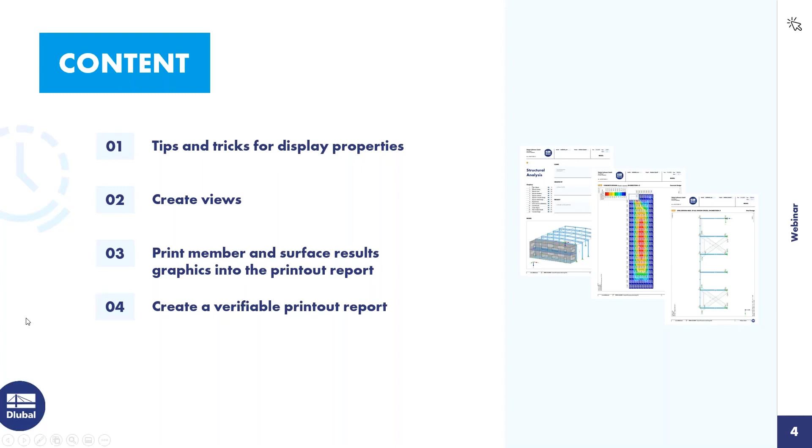Okay, then we turn to the program. That's the model of today's webinar. There are members of steel and surfaces of concrete. I designed the steel structure and that slab here. But before I start, I would like to introduce something. I would like to show you the loads.

So without results, the self-weight load case with the roof loads and the loads on the slabs. Then the imposed load with the loads on the slab. The snow load case. For the snow load, I use the snow load wizard. I can display it by right click on the load separately. That's the load from the snow load wizard. And if there are members below, then the program creates member loads automatically, and you can see that here in that setting. Okay, the same is valid for the wind load case, wind in X direction.

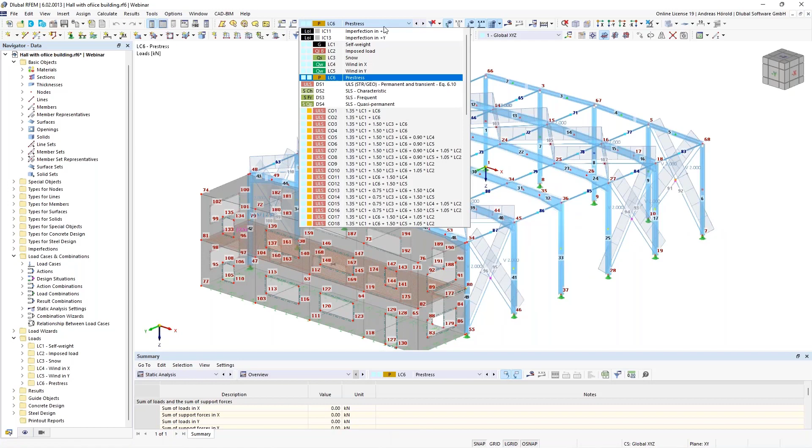I can display it also separately. Here are member loads and on this side, surface loads. So wind in X and wind in Y direction. I created only two wind load cases in this example. And the last load case is the pre-stress. And we've got also imperfection cases in X direction and Y direction. Okay, that's all to the loads.

Then here left in the navigator data, I do right click to open the dialog load cases and combinations. I go through this dialog very quickly. In 2 weeks, I will present a webinar only describing these dialogs. I used for the combinations the Eurocode 0. You can see here different international standards. And for the Eurocode, there are a lot of national annexes implemented. I use the German national annex.

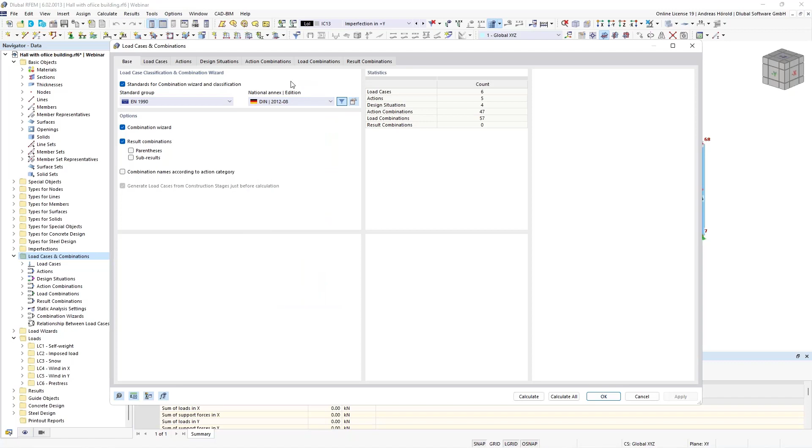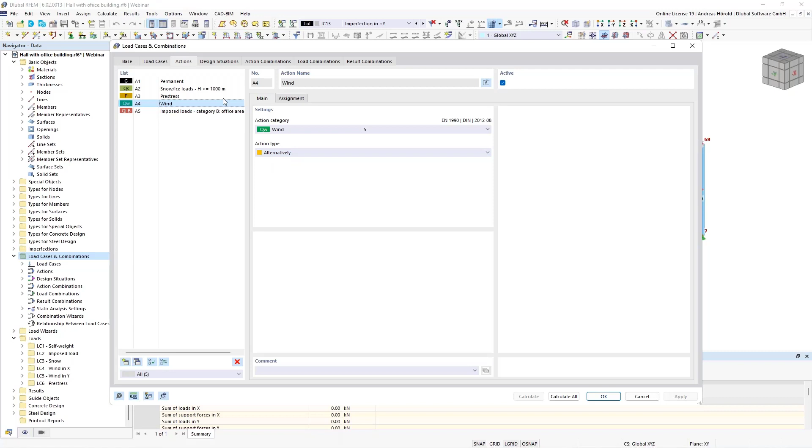Then the load cases, the 6 load cases that I introduced at the beginning, the actions, for example, the wind action, there are the two wind load cases assigned, and they act alternatively. Then the design situations: design situation number 1 is used for the concrete design and steel design. It is for the ultimate limit state design. Then design situation 2 for the serviceability limit state design characteristic. It's activated for the concrete design and steel design, and these 2 design situations for the serviceability limit state design are activated only for concrete design.

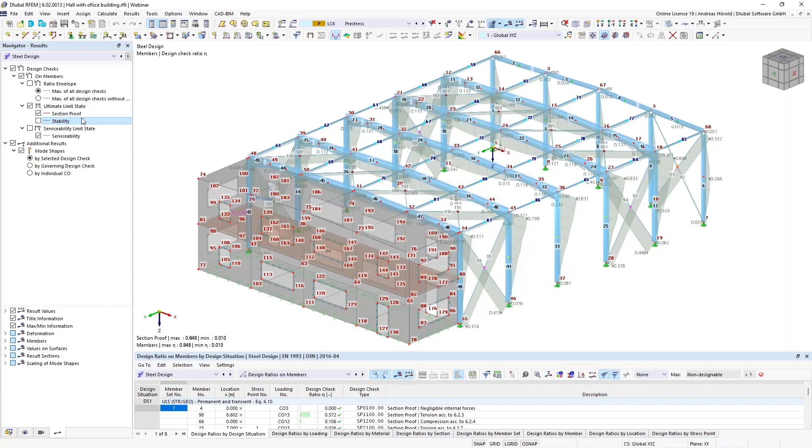So if you click on overview, you can see which load combinations are assigned. I can click through them. And here in this dialog, you can see all 57 load combinations. Then I designed the steel structure with the add-on steel design. So without loads, now you can see the maximum ratio of all design checks. Then I can click through these single designs here, the ultimate limit state section proof, stability, and serviceability limit state design.

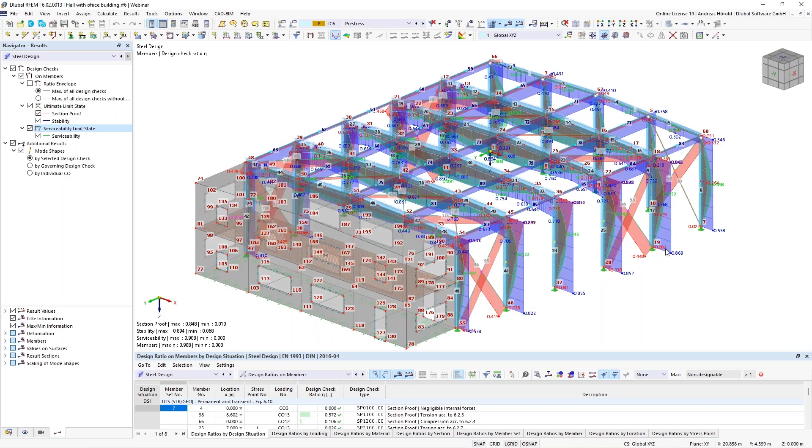Okay, although they are displayed in different colors, you can see it's quite confusing. That's why we print not only the isometric view with the separate design checks. We create views in axis 1, axis 3, and axis A with the multi-print feature. Okay, I disable it. And then I show you the concrete design.

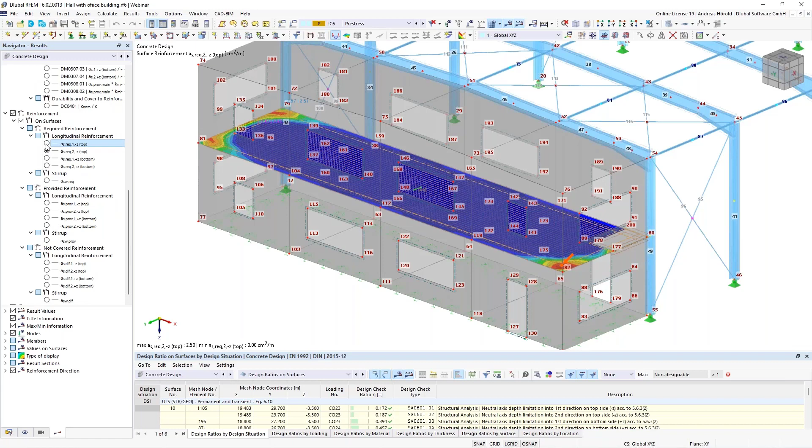I designed only this surface here, the slab. I can zoom in a little bit with the mouse wheel. Then here in the navigator results, I can click through the required reinforcement, and I would like to print these 4 graphics in the printout report later with one step.

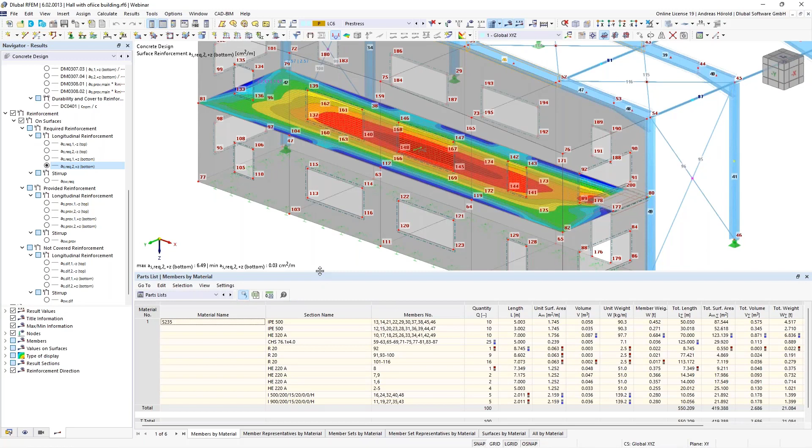Okay, then parts list. We will also print a parts list in the printout report. I will come back to that later. That's a new feature in RFEM 6 and RSTAB 9. So before we print anything, I define a line grid. Just a moment. Static analysis. So line grid. Left above in the menu, insert, then guide objects, line grids.

Usually you define a line grid as the first step, not afterwards. I do that retroactively, and it's not a problem. You can do that anytime. I would add a label text. Then here, line grid, I have to enter the distances in X direction, 4 times 5 meters. You can edit or change the labels here. I leave it as it is for this webinar.

Okay, then also 5 meters in Y direction, 5 times, and a short distance, that's the distance between the concrete and steel structure. Okay, that's all. I can apply it and I'll see it in the preview. Okay.

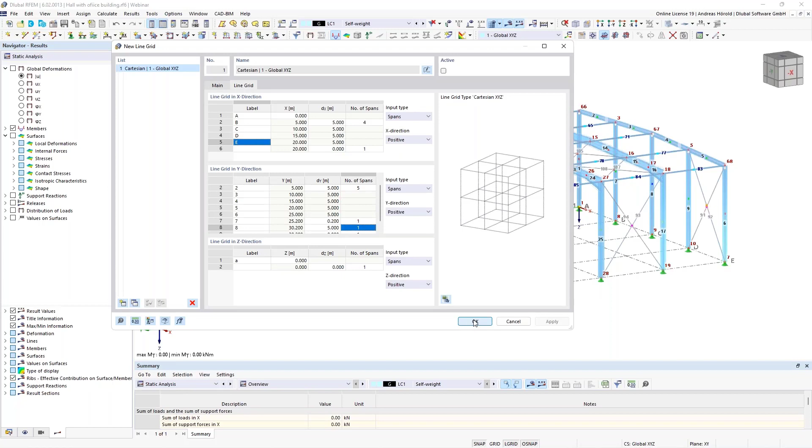So I forgot to activate it. No problem. I go to the navigator data. Here under guide objects, you will find the line grids. And with a right click, you can activate the line grid. I can double click on it. I forgot to set this check here. Okay. If I would like to change anything in the display settings for the line grid, I can right click on it and open it.

Just a moment. I load the white background. Okay. So I can leave the dialog again. Right click, I show it again. Display properties, and you will get directly to the category here. A tip from my side: the categories in the display properties are similar to the categories in the navigator data and navigator display. If you want to find anything, you can right click on the object, find it here, and then it's easier to find the object in the other navigators.

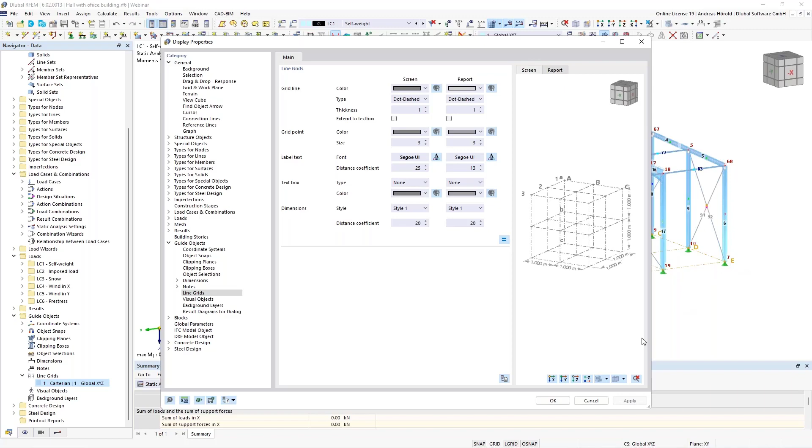Okay, then I change the font to bold and size 12 and change the distance here. Just take a look at the text here. When I press apply, it will be larger. Okay, so now the line grid is complete. I know where each axis is and can start with the views.

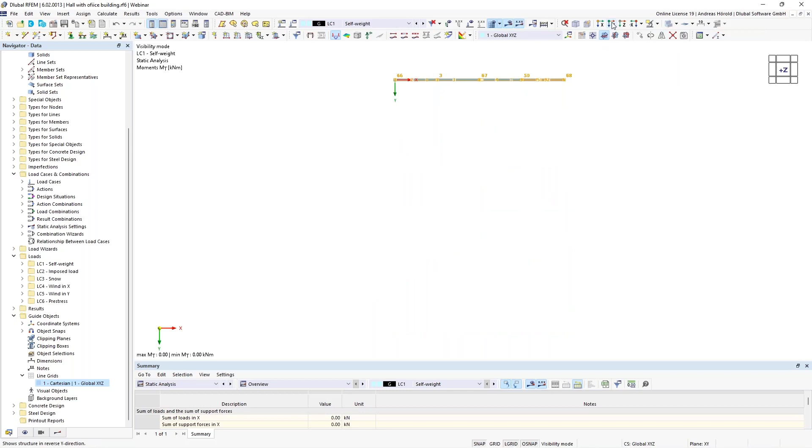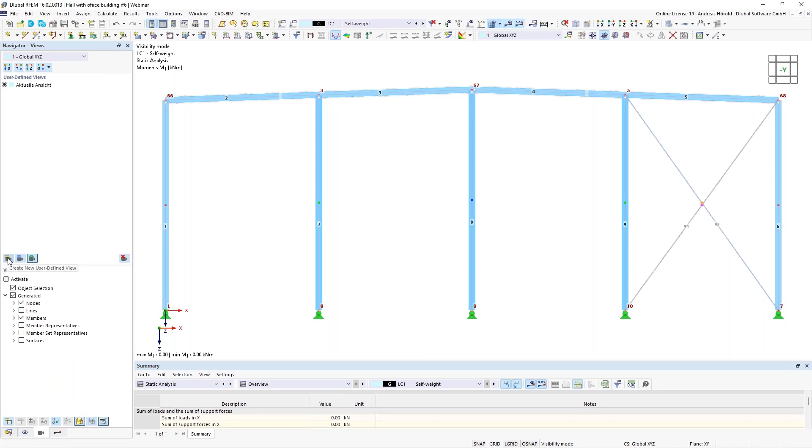Here right above, I click on view in Z direction. Then I select all objects in axis 1. Press visibility by selected and related objects. Change the view to -Y direction. Okay, that's the view I would like to create. So at the bottom left, I change to the navigator views and create a new view with that button here. I call it axis 1. So that's the first view.

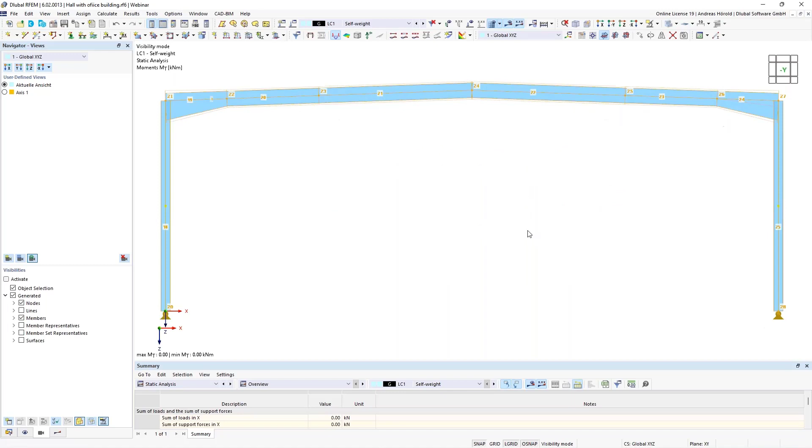Right above, I click on cancel visibility mode, change the view, select all objects in axis 3. Then I display only these objects, change the view again. And I can save the next view, axis 3. Okay. Then the same workflow again.

So all objects in axis A. Then view in -X direction. Okay, I can zoom in a little bit. Now I can cut the concrete structure. It's not interesting for our results for the steel design. So axis A.

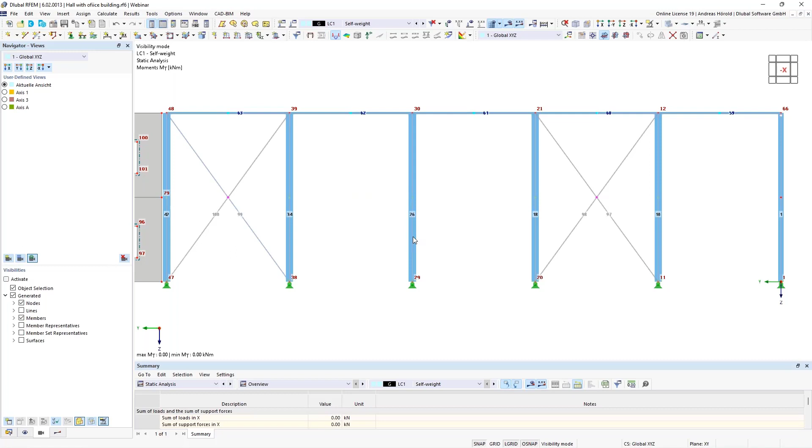Then I cancel the visibility mode again, and I select the concrete slab. Display only this one. Change to Z direction. Okay. And I would like to create a view also for this slab. As you see here, I created a surface reinforcement for the concrete design. It's a mesh Q257. And I don't want to display it, so that it does not disturb the display of the results.

But I'm not sure where I can find it in the navigator display. That's why I apply the tip that I gave you. So right click, display properties.

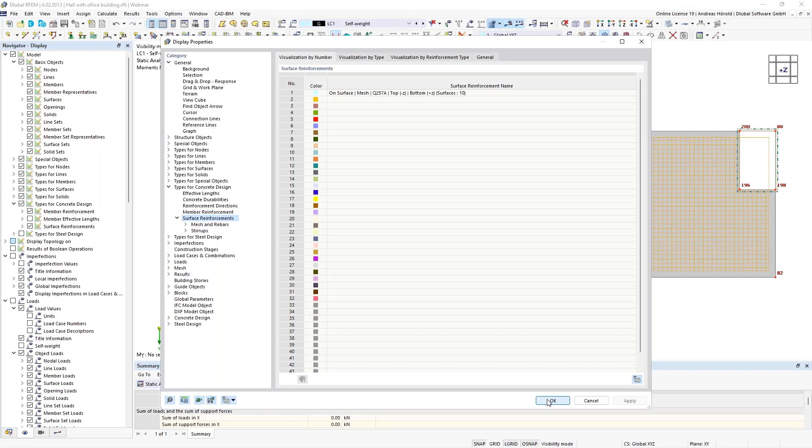Yeah, and you can see in the category under types for concrete design, you can find the surface reinforcements. You could change the color here, but I don't want to change anything here. I used it only to find the category for the navigator. Okay, types for concrete design. You can find here types for concrete design, surface reinforcement, and I can deactivate it for the display.

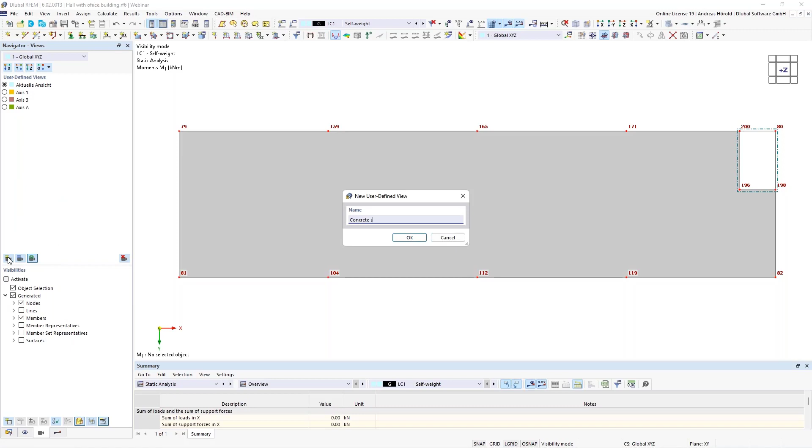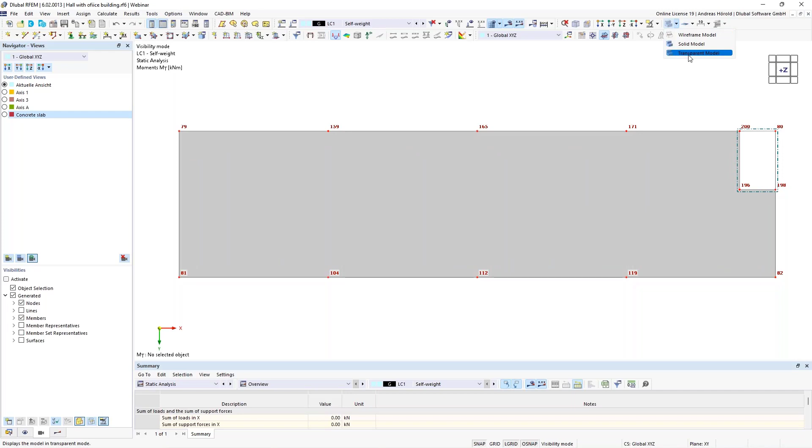Okay, then I create the next view. Concrete slab. Okay, so now I recognize that the gray color here can maybe also disturb the displaying of the results. I use the view transparent model and I change to wireframe model.

But now I have to update the view. How to do that? I unlock the views with that button here. Then with the middle button, I redefine according to current view. Then I lock all again, and then I can switch between different axes and can see the view is updated. So then all views are created. I cancel the visibility mode again and use the transparent model.

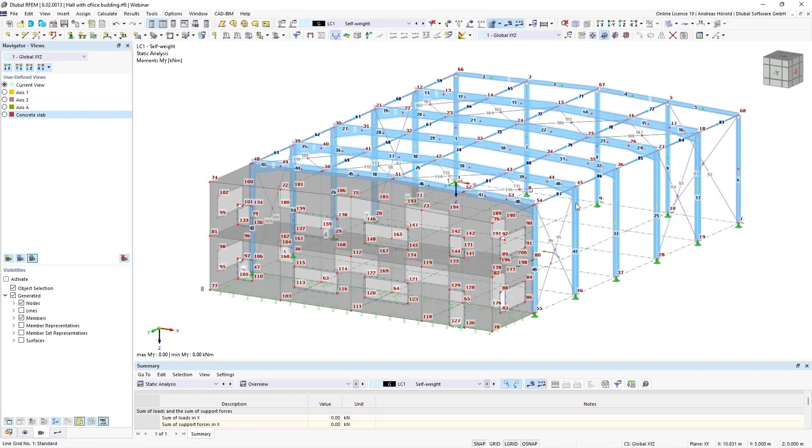For the isometric view that I want to print also in the printout report with the steel design graphics, the concrete structure maybe disturbs also the display. So that's why I would like to deactivate it, or I don't want to display it. So that's why I select all, and here right above I hide the selected objects. So now it's not visible. Maybe we can display it but hidden.

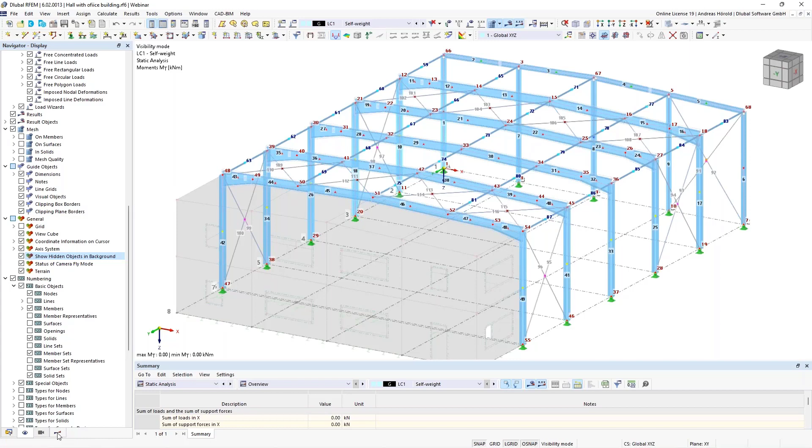How to do that? I change to the navigator display, scroll a little bit down, and under the general settings you can show hidden objects in background. Okay, I like that more. So then in the next step we can print the steel results. So I can display them again. So, okay, maybe I can rotate it a little bit. I would like to print that view and the other views.

So left above here, you can open that drop-down menu and select Print Graphics to Printout Report. So then you can see a preview here. You can rotate the graphic. That would be 0. And if you want to rotate it in a clockwise direction, then for example 90 degrees, then you need to select this. But I would like to rotate it 90 degrees anti-clockwise. That's why I use

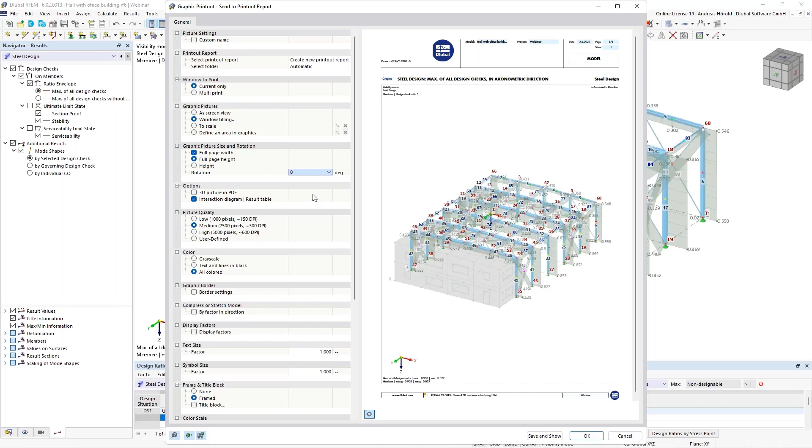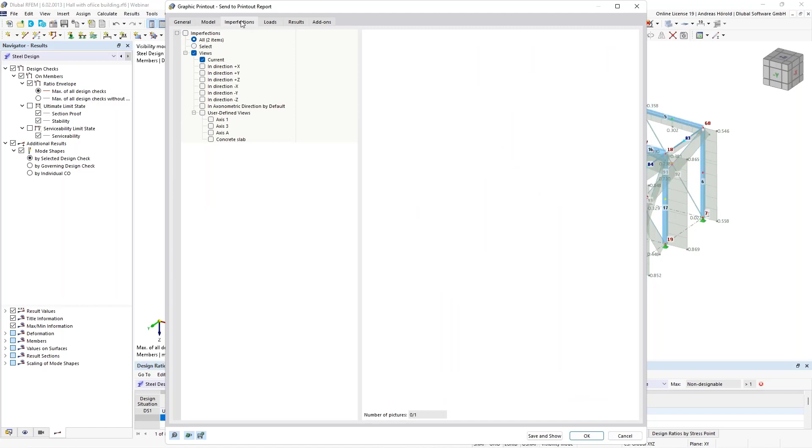270. So you can use a screen view or window filling. It doesn't matter. Okay. And if you want to print only this graphic in the printout report, then press OK or save and show. That's quite easy, but I would like to use the multi-print feature. So I go through the single dialogues. I don't want to print the model, no imperfections, no loads, no results.

It's of course possible to print the member results, for example, the internal forces. I would like to print only the steel design results in this webinar. So the current view, that was the isometric view, then the saved axis. Then on the right side, I select the maximum of all design checks, the ultimate limit state, section proof, stability, and the serviceability limit state design. And at the bottom, you can see there are 16 pictures that are created in few seconds.

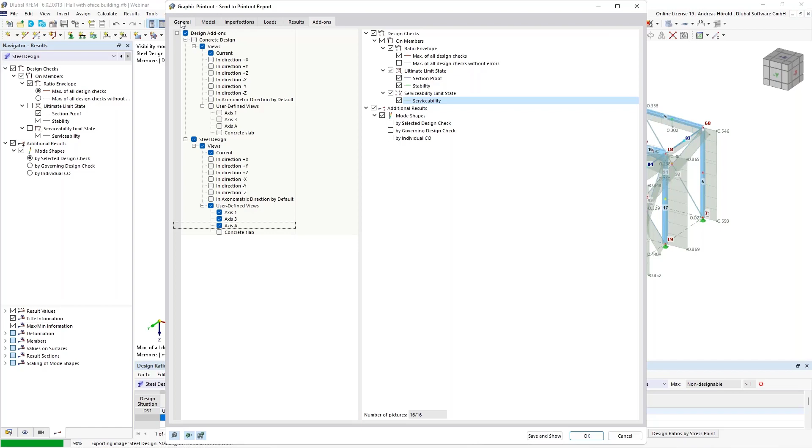I switch back to the general dialog. And all images are created. So that's the isometric view with the 4 design checks. Then axis 1 with the 4 design checks. Yeah, and you can see in the preview, it's quite good readable in the views. And this is axis 3, etc. Then I press save and show.

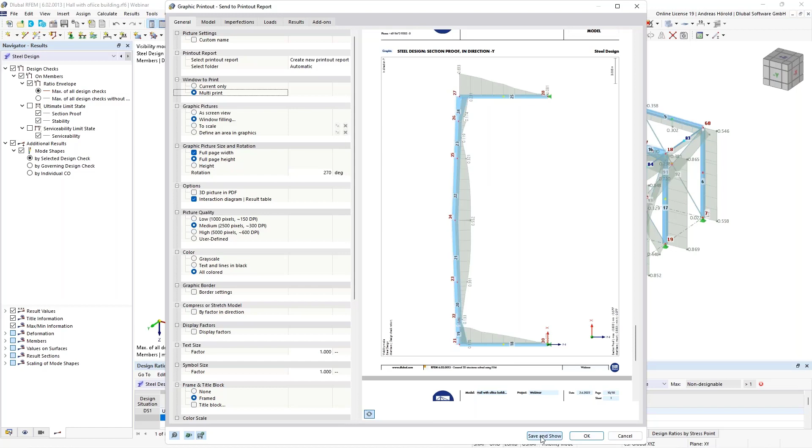And we turn to the next dialog, printout report manager. Since we open the printout report for the first time, we have to select what we want to document. Okay, and here at the bottom left, you can load from a template. There are different templates already available. For example, the input data and reduced results. That's the default setting. Then the concrete design, steel design, etc. So I use the default setting. Yeah, and of course you can save a template with this button here, save as template.

Then parts list. I select only this one and this one to show it later in the printout report. So then, for example, concrete design, where are the tables with the design ratio and surfaces selected, then the required reinforcement. For the steel design, the design ratio and members by member set and by members. Okay.

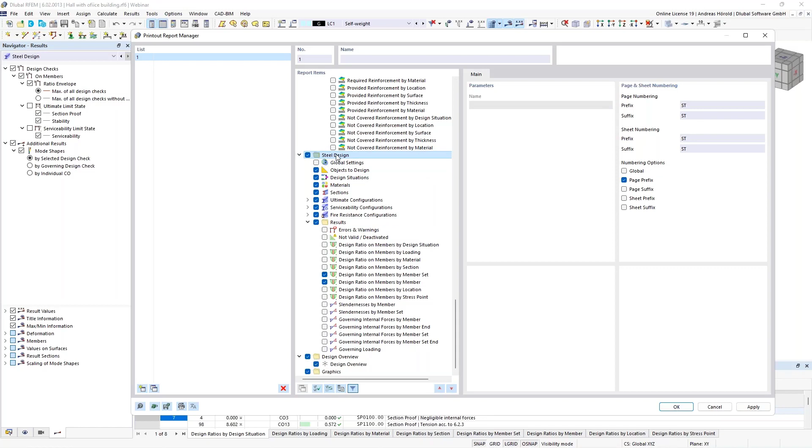So on the right side, you can select here, for example, page prefix, then prefixes will be added, for example, for the steel design, ST, or for the concrete design, CO, or for the model, MO. So, okay. Then the printout report is creating. At the first time, it takes some seconds. Okay, that's the printout report.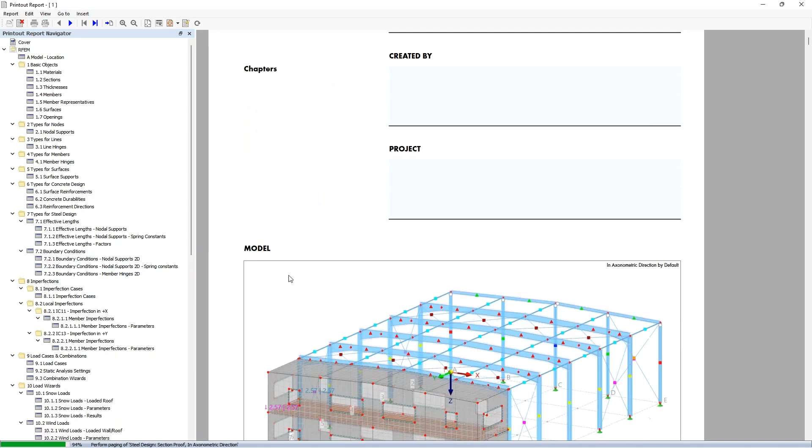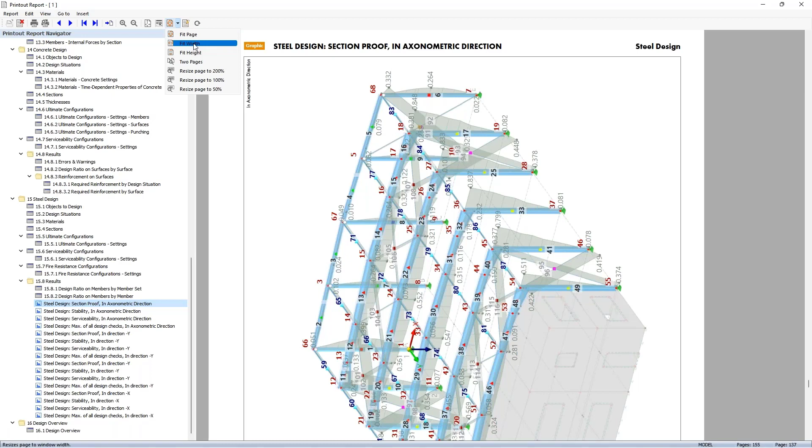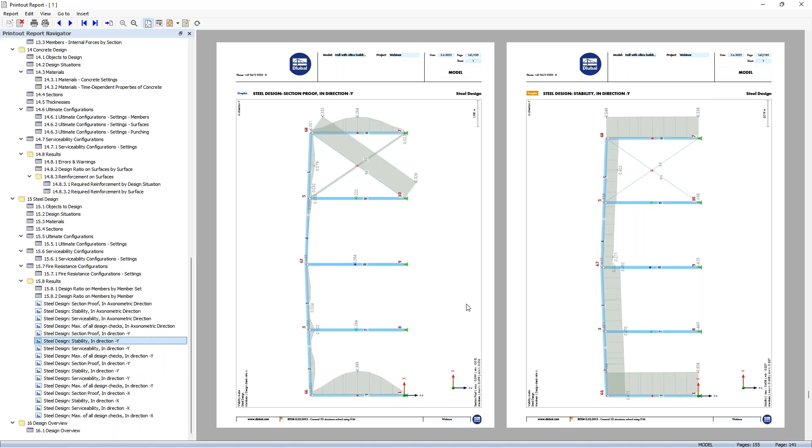On the left side, you can see the content. And what's interesting to us in the first step are the graphics here. Above, you can switch between different displays, for example, fit page, fit width, fit height, and so on. 2 pages. I fit the pages. Okay, so the 4 graphics for the axonometric view. So then axis 1, axis 3,

and axis A. As you can see, the last 4 graphics are with the concrete structure, and I can modify that. With the Shift key, I can select all 4 graphics here on the left side. Then I do a right click, go to Properties, and select not window filling, but as screen view. And all 4 graphics will be updated in the next seconds. So let's take a look. Okay, now the concrete structure is cut again.

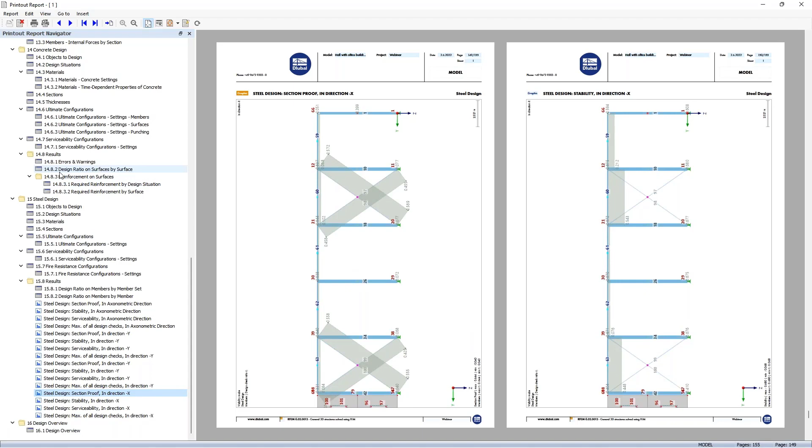So then I would like to show the parts list. I fit the width. Parts list. You can see in this table here the section name, then the length, the total length, and the sum of the length, then the total surface area, for example, to calculate the coating or galvanizing, the total volume and the total weight. And you can also document the total weight by material here, steel and concrete.

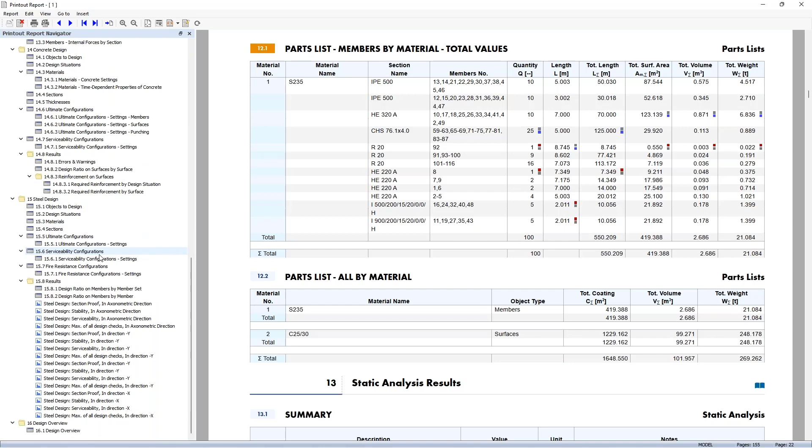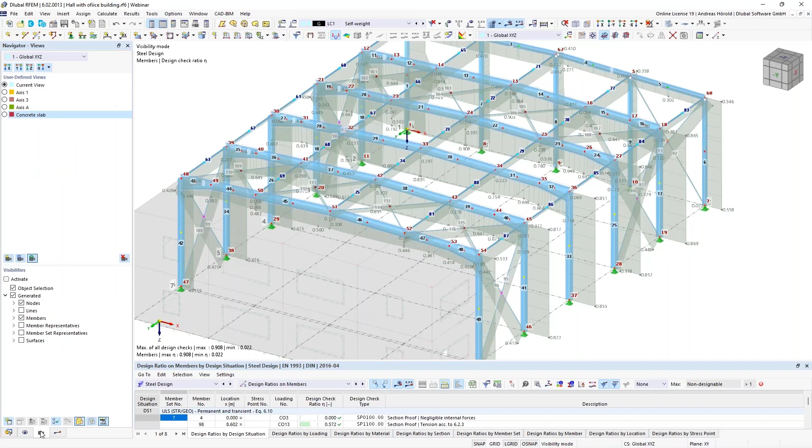Okay, then I moved the printout report a little bit on the other screen, and as you can see, I can work in the program and in the printout report in parallel. So I move it completely to my other screen. I would like to show you another feature. I select axis 3, and I would like to print the result diagram of this member set here, the horizontal beam. That's member set 3, and I would like to print it in the printout report.

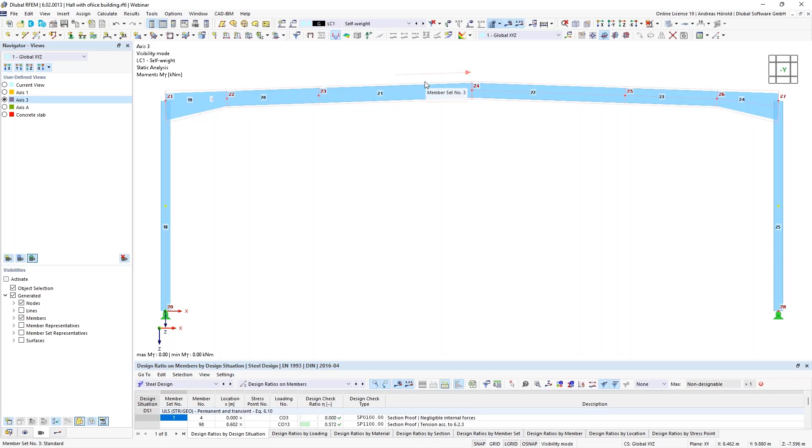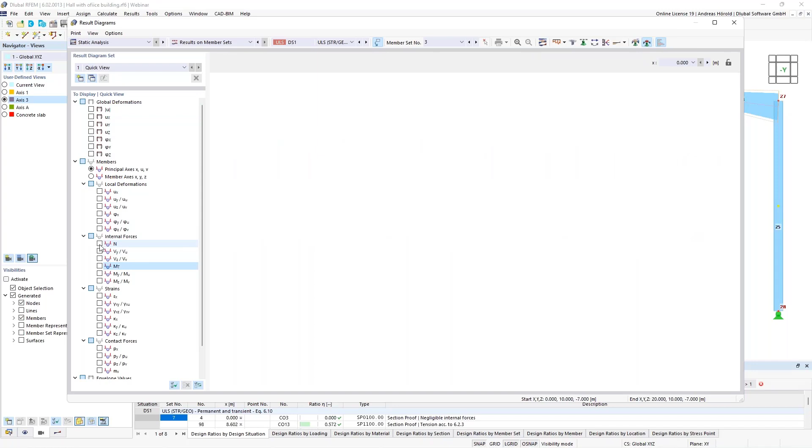Right click on the member set, then result diagrams. So then I have to select here, results on member set. That's okay, but not the self-weight load case, but the ultimate limit state design as design situation number 1, member set 3. Okay, I would like to document not the global deformations, but all internal forces. N, V, M. Okay, so 6 diagrams are displayed, and with that button above, or with the drop-down menu, print graphics to printout report, I can print that graphics. So all graphics on one sheet at the moment.

I can press here on the left side, determine diagram height automatically. And now it's much better. And you can also set the diagram height manually. I tested it before. 7 centimeters is also a good parameter. Okay, then save and show. You can leave the dialog, and we can take a look in the printout report. Here is the result diagram. I fit the page, and you can see the 2 pages here.

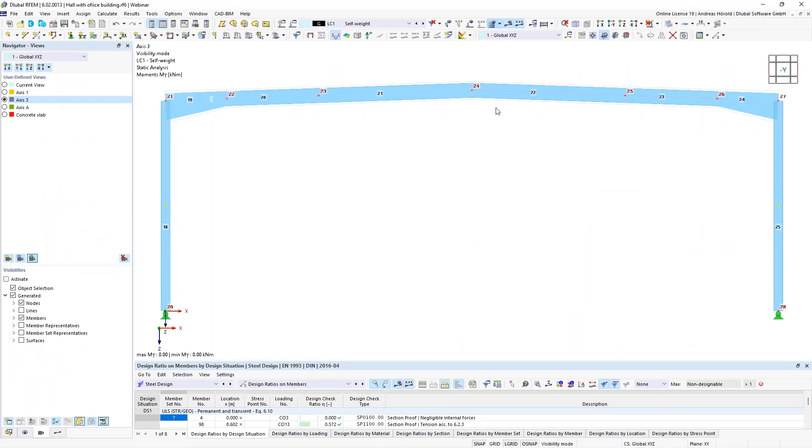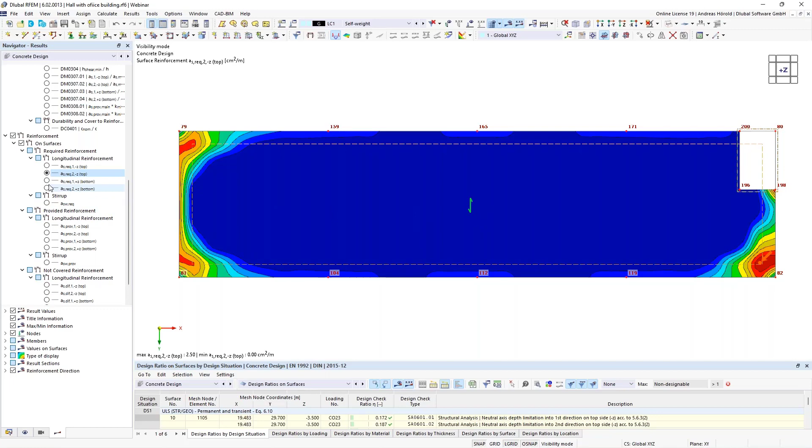Okay, that's all for the steel design documentation. I continue with the concrete design. So that's why I go back to the program. So I use the view concrete slab. Let's display the concrete design results. Okay, then I change here left above to the navigator results. And we can click through the single results, the two directions of the reinforcement on the top and at the bottom. You can see the direction of the reinforcement with that arrow here.

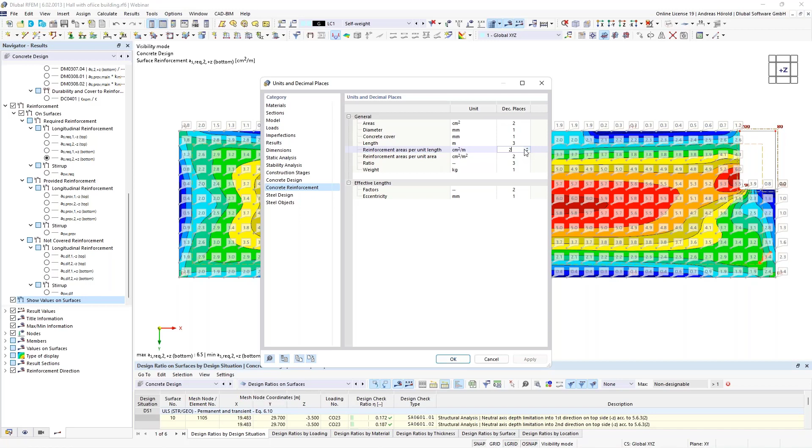Okay, and I would like to display the values as well. If you want to delete one decimal place, then you can go here left above to edit, then units and decimal places. And under concrete reinforcement, you can find the setting here, reinforcement areas per unit length. So, if I change that and press apply, you can see in the preview there's only one decimal place now. Okay. I leave it as it is. Let's try it. Okay, then I print all again.

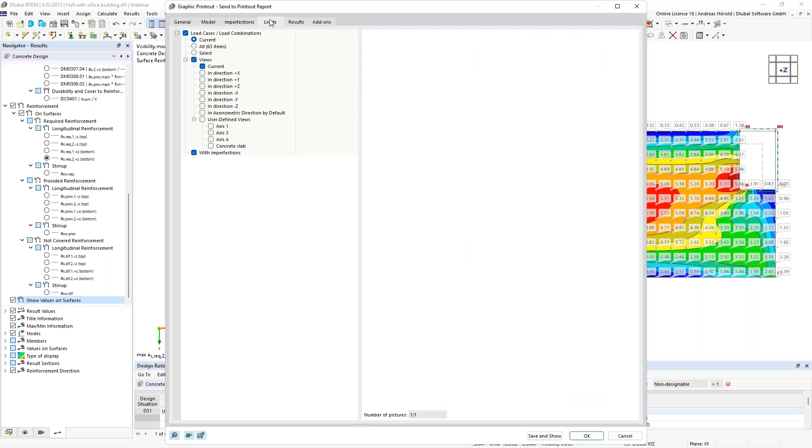In the first step, I select the current view. Yeah, that's quite okay. The rotation is okay as well. Window filling, okay. And I select the multi-print. I would like to print all 4 graphics.

So, concrete design, the current view, and the 4 results for the required reinforcement. And I select also show values on surfaces. Here, 4 pictures will be created.

We can scroll through the 4 images. Yeah, it looks quite good. Then we can press save and show and go back to the printout report. So, take some seconds. All is updating.

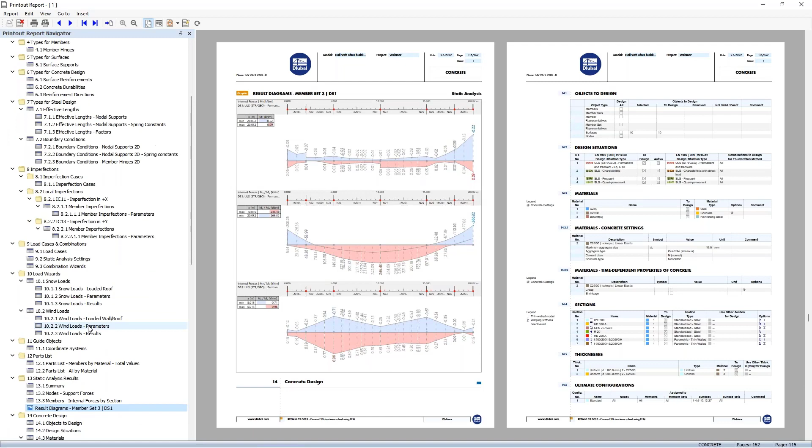So, now the 4 graphics are printed in the printout report. Yeah, I think that's quite easy. Just test it. And that's all for the steel and concrete design documentation. I will continue with general features of the printout report.

So let's click through the menu. Here left above, the report. Yeah, close report, it's clear, and so on, delete. And at the end, we will export the finished printout report to a PDF. So edit, you can edit the printout report. It's the same button as here. You can add more topics if you want.

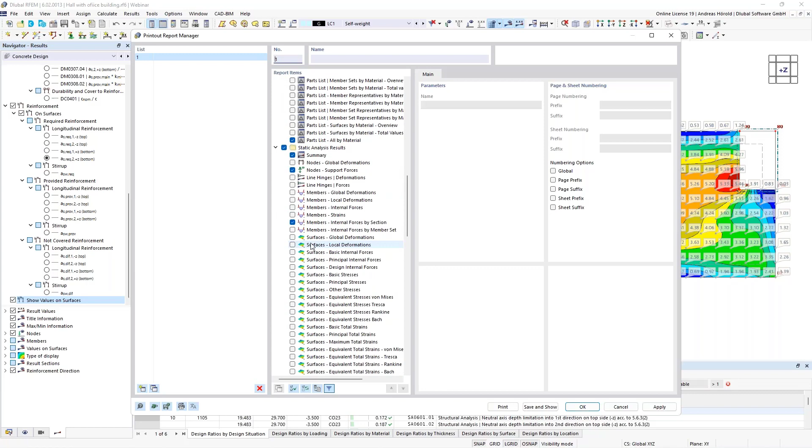So I go back to the printout report here. So then you can use the copy, cut, and paste function. Shortcuts, Control and C are available, and so on. So you can set a language. You can translate the full printout report in another language.

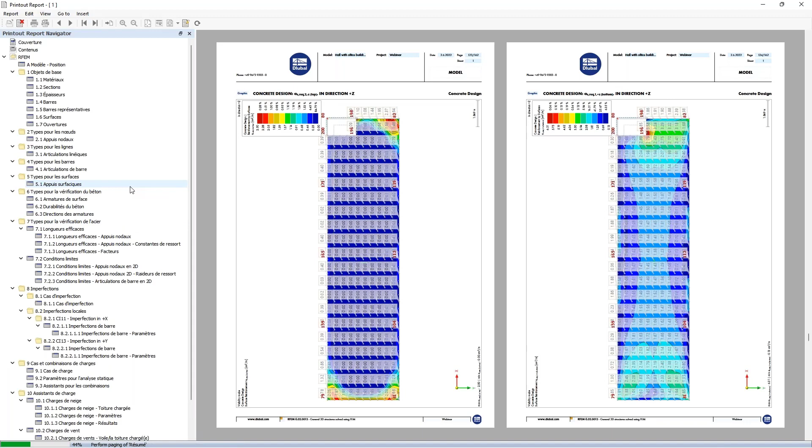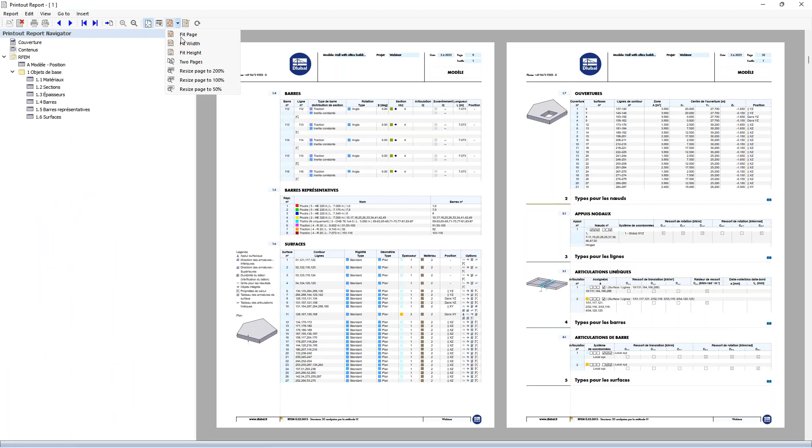I select French. There are 11 languages available in RFEM 6 and RSTAB 9, and it takes only a few seconds to translate such a printout report. Now we have got more than 150 pages, and you can see that it is already translated here. All is in French now.

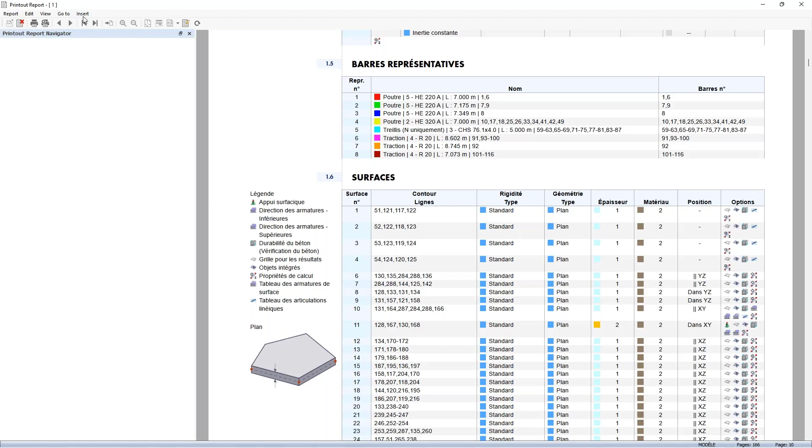I change it back to English. Okay. Then we have to wait some seconds. Go to, yeah, where are these buttons? You can switch between the different pages. You can open here, go to. I would use these buttons here, come to the end, to the beginning, to the next page, and so on.

And you can also click through the menu here, or the content, or navigator. So then insert, you can insert different things, images from file, an image from clipboard, then a plain text, rich text, HTML, then formulas, PDF. And I would like to insert a plain text and a PDF. The workflow is similar for all. So I start with a plain text.

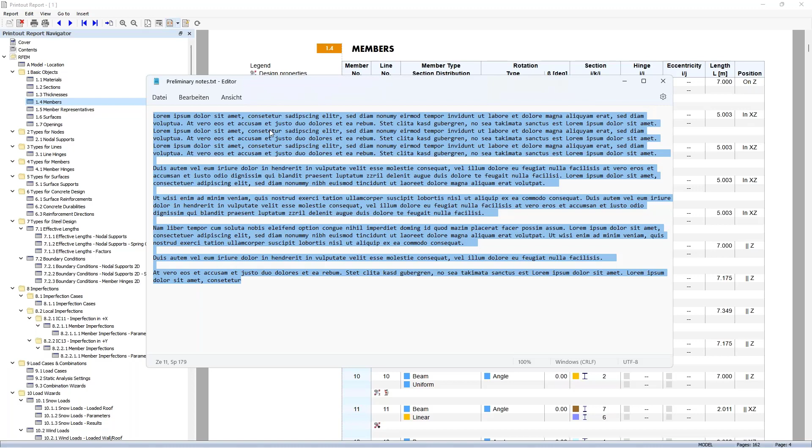For example, you have to add the preliminary notes. You can do it this way. I prepared a dummy text, and with Control C, I can copy that, and Control V, I can insert it here. Okay. It will be added at the end of the printout report.

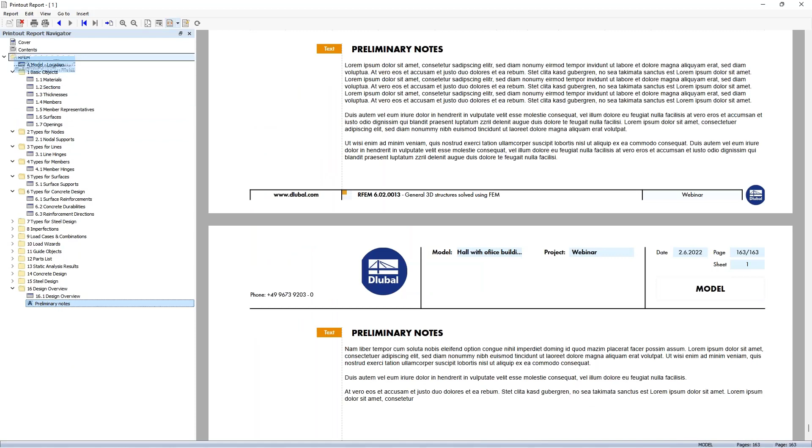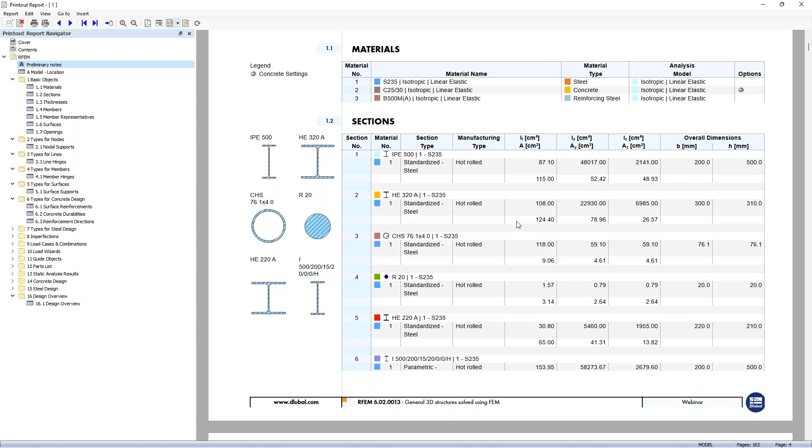I close here some folders so that you can see that I can drag and drop it here at the beginning. Okay, now there are the preliminary notes, model location, and so on. Those are mini pictures. They support the tables, I think. Here the single sections, for example, the internal forces on the members, etc.

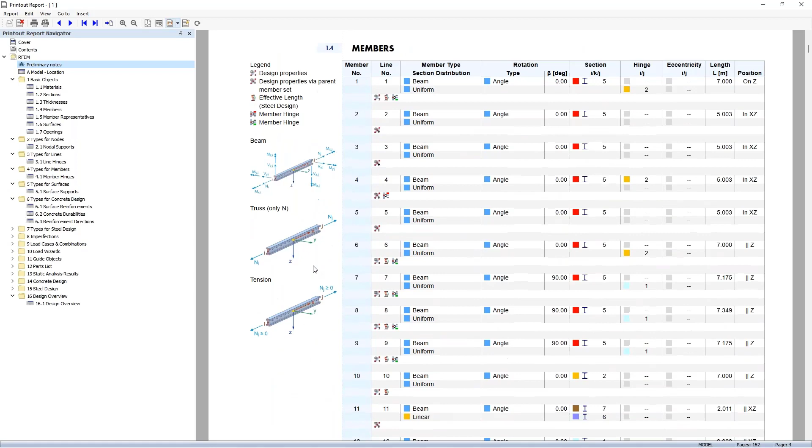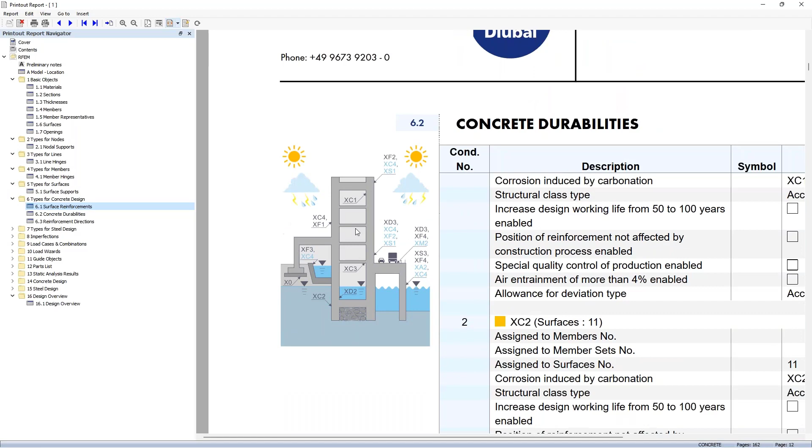Or for example, for the concrete design, this graphic here, can zoom a little bit in. For example, with the dimensions here, the diameter of the reinforcement, etc. Or this graphic here for the concrete durabilities, we used XC1 and XC2, and it's such a supporting mini picture.

So in the next step, I would like to insert a PDF. That's why I go to our website. So I switch to dlubal.com and English. And under solutions, you can find the snow load, wind speed, and seismic load maps.

Okay, took a long time, I don't know why. There are different international standards available, and for the Eurocode 1, the different national annexes. You can see at the moment the United Kingdom. I enter a location, the location of our subsidiary in Leipzig, Germany. That's what I used for my design.

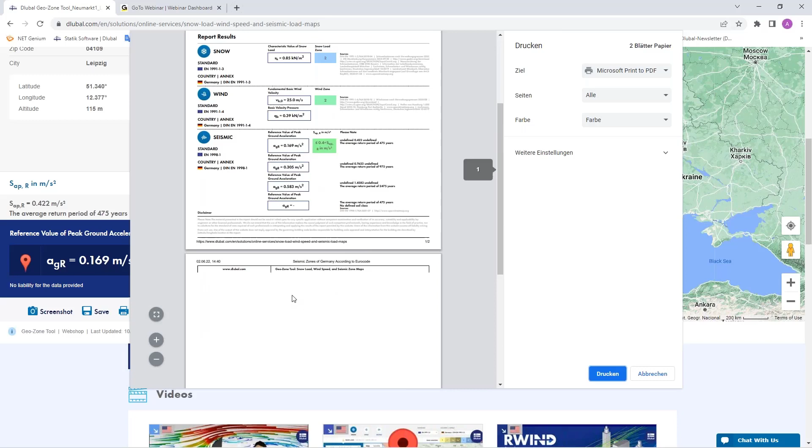So, and you can see the characteristic snow load here, the wind parameters, and the seismic parameters. And with that button here, you can print it in a PDF, for example, or directly. So yeah, only page 1 is interesting to us, and you can see the map, the address, and the results from the load maps. Okay, I print only page 1, or yeah, I print all.

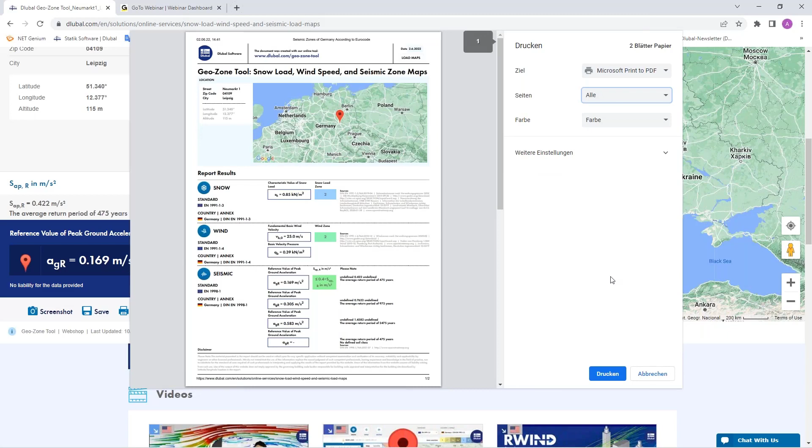Yeah, it's in German. My Windows is in German, sorry.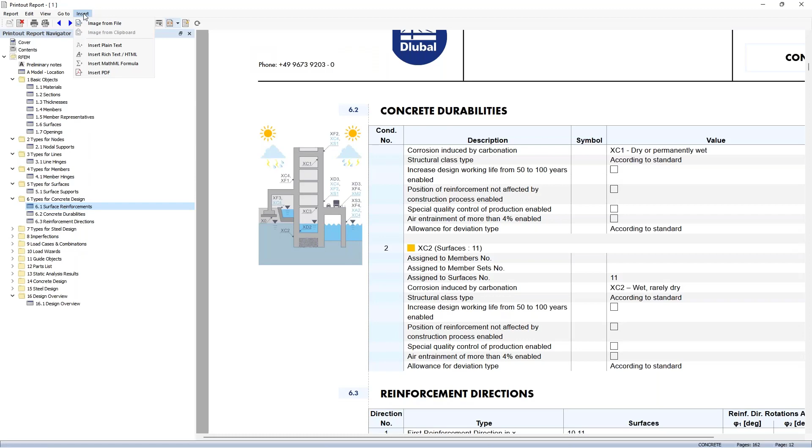Okay, and I print it on the desktop, load maps. Okay, then I go back to the printout report, press insert, insert PDF, then desktop, load maps. Okay, that's the preview, 2 pages open, and I can take over only 1 page, for example. I use only the first page.

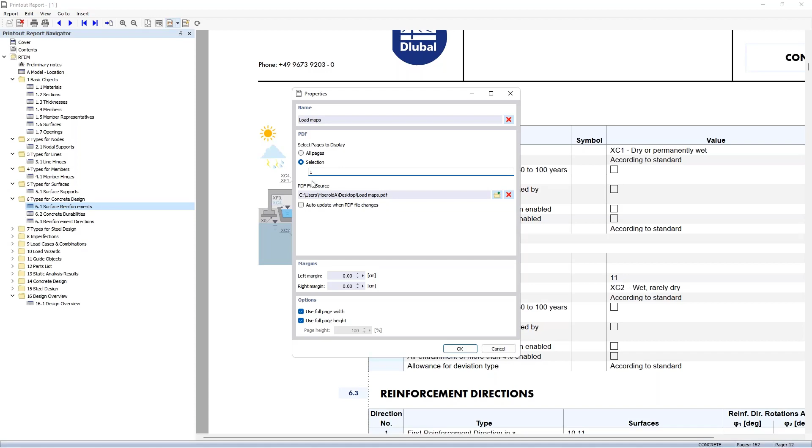Okay, and that's why only 1 page has been inserted. Okay, I move it before the wind load wizards. So, okay, the load maps with the values and then the load wizards for snow and for wind. Also here the mini graphics.

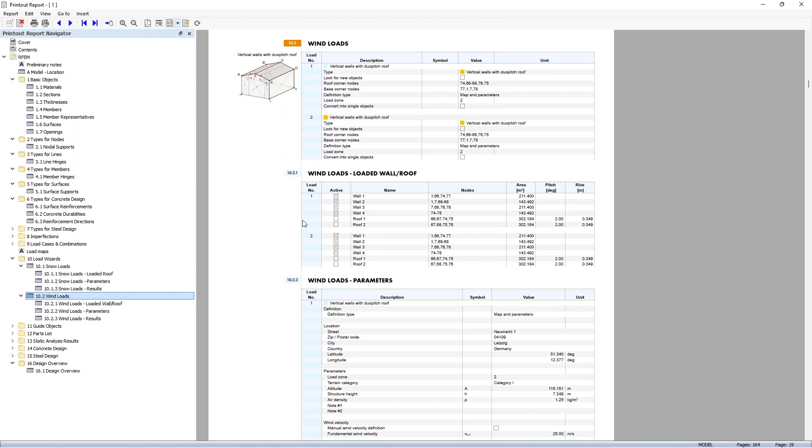Okay, then in the next step we come to the cover. With a right click on the cover, I can press here edit. Yeah, let's go through the single dialogues here. Printer settings, yeah, I think it's clear. Page setup with the paper format. You can also select another format. Then, yeah, the margins, etc.

Then other settings. You can enter the address of your company here. I enter Dlubal Software GmbH. Then our address of our company, Am Zellweg 2 in Germany, Tiefenbach.

Okay, and I can save it as a template. I call it Dlubal. Okay, as you can see, there are 3 templates already available, and I save Dlubal for my next printout reports.

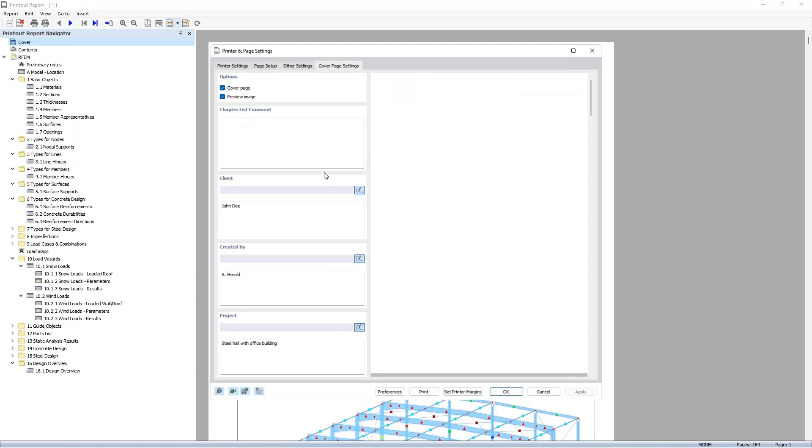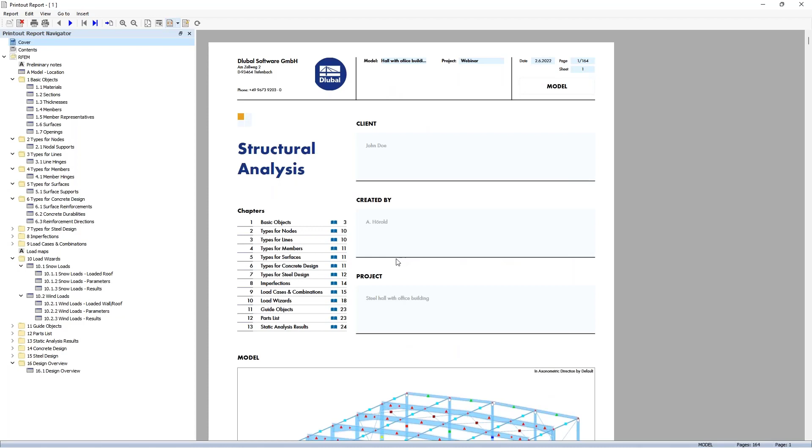The cover is finished. And you can, of course, also change the logo here. Go to edit again. Here, the logo path, you can change it, of course. So the next step, what I would like to show you, the folders. You can move such folders here. For example, types for concrete design.

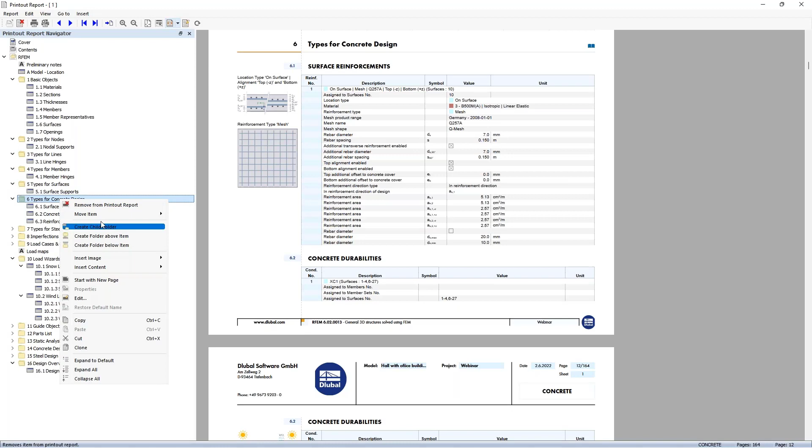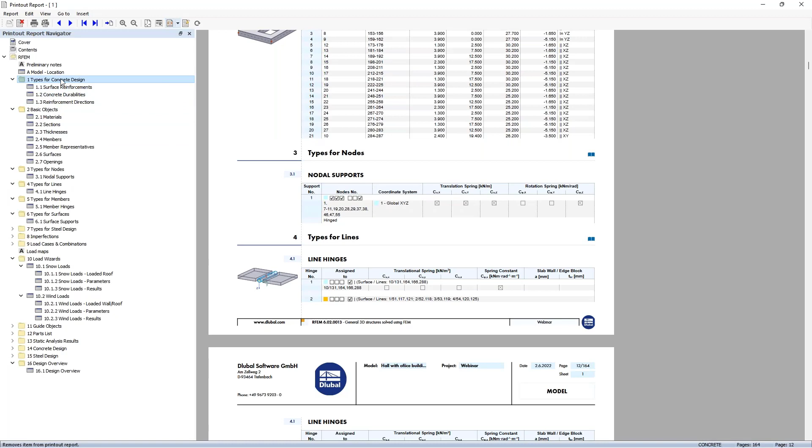If you do a right click, you can move the item to top, or yeah, move the item down, item down. Okay, it was on the 6th place, as I remember right. You can do, of course, also drag and drop.

So, and you can create a folder, a child folder, or a folder above the item. I call it test to show it. Yeah, you can add to this folder, for example, graphics from the printout report or PDFs or something like that. Okay, I delete it.

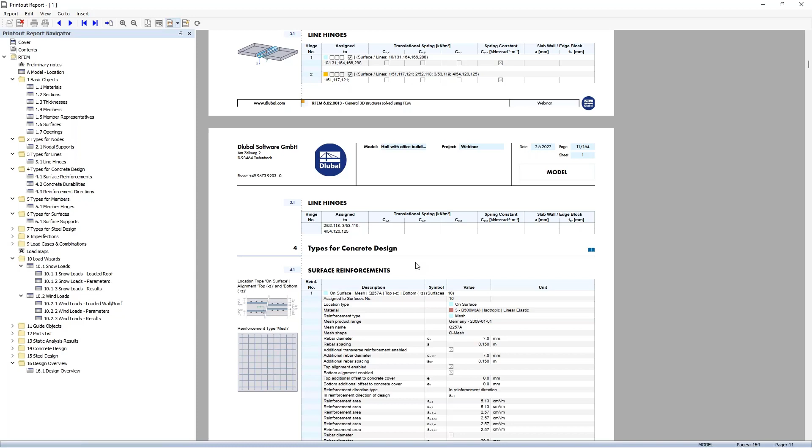Okay, the printout report is complete for this example. I can go to report, export to PDF, and I call it PR, printout report, save. Okay. In the next seconds, it will be finished. So it's on my other screen. So that's the PDF of the printout report.

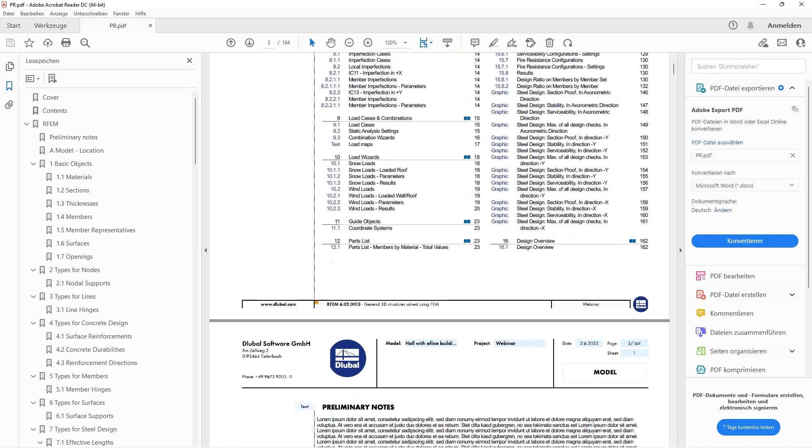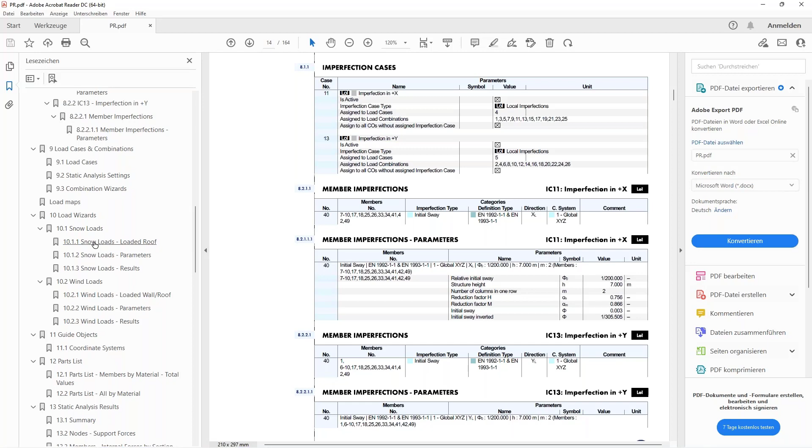And what I like are the bookmarks on the left. You can switch between the single folders and so on. Yeah. Also a quite good feature.